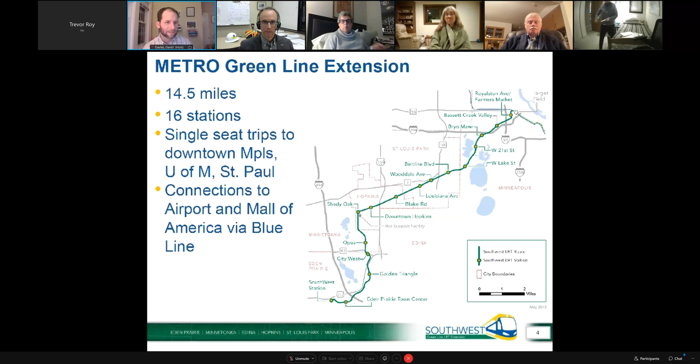I wanted to jump right into getting a better understanding, a brief grounding, of the Kenilworth LRT tunnel and its construction. The tunnel, as a lot of people are aware, especially those who live adjacent to it, is constructed using a cut and cover method. Essentially what we're doing is excavating a big trench, then building the tunnel inside that trench, and covering it back up. The tunnel is almost 2,900 feet long.

In our construction update and in our meeting tonight, we like to talk about the tunnel as divided up into segments, or cells. There are about 30 cells, and they're generally about 100 feet in length. You'll see that when we refer to where construction activities are in the tunnel segments, which segment is being excavated, which segments are having concrete poured in them. So it's a good reminder that there are 30 cells that comprise the tunnel, about 100 feet in length, give or take. Clearly it's not 3,000 feet long, but there's some wiggle room there at the ends.

You'll notice as we go forward that we have lots of different work activities going on at any given time in these cells as we're progressing. For instance, when we're moving through the parkway, we have a work area that's about 700 feet long, where different activities happen almost like an assembly line, one activity in one cell, different activities in the next cell. So it's quite a challenging and complex process to progress construction of the tunnel.

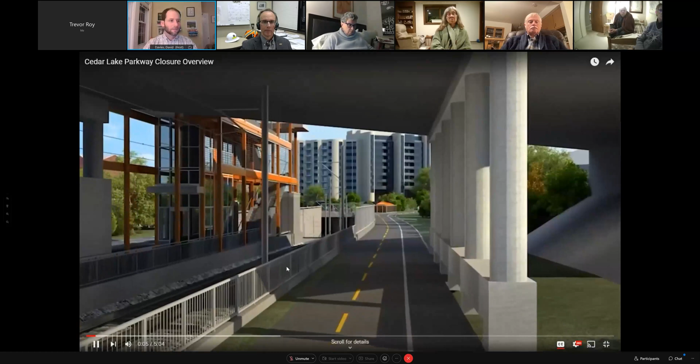The Kenilworth LRT Tunnel is a 2,870-foot structure that stretches from just east of West Lake Street to just south of the Cedar Lake Channel.

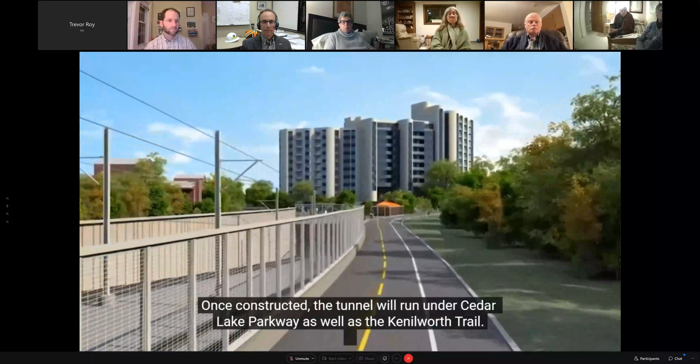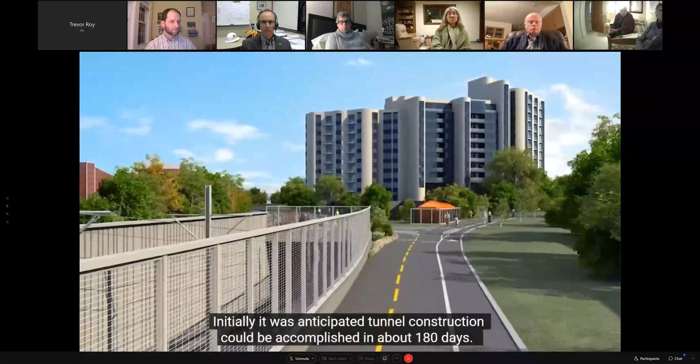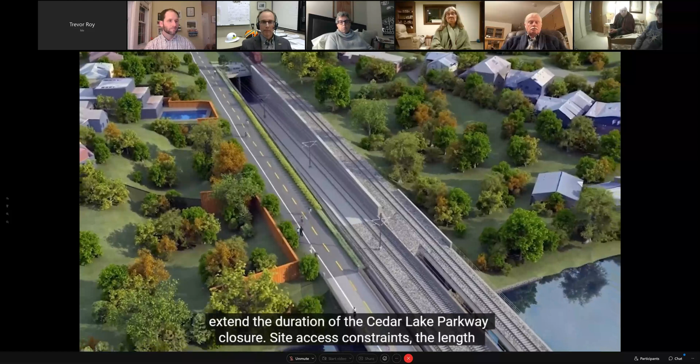Once constructed, the tunnel will run under Cedar Lake Parkway as well as the Kenilworth Trail. In order to advance the tunnel, Cedar Lake Parkway needs to be closed for an extended duration. Initially, it was anticipated tunnel construction could be accomplished in about 180 days. Now that construction has commenced, the contractor faces several challenges that will extend the duration of the closure. Site access constraints, the length of the work area, and the specific order of construction operations all contribute to a longer duration.

It is now estimated that the parkway will be closed in early February and reopen around Thanksgiving.

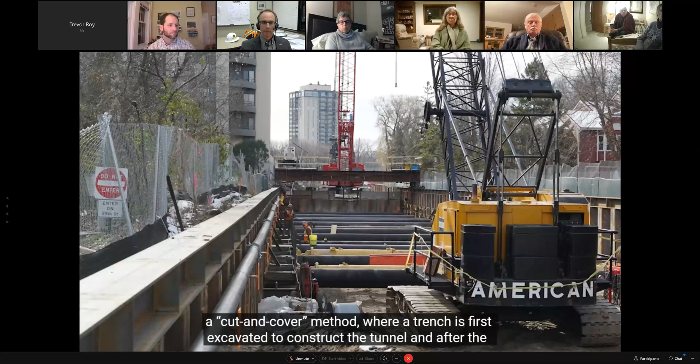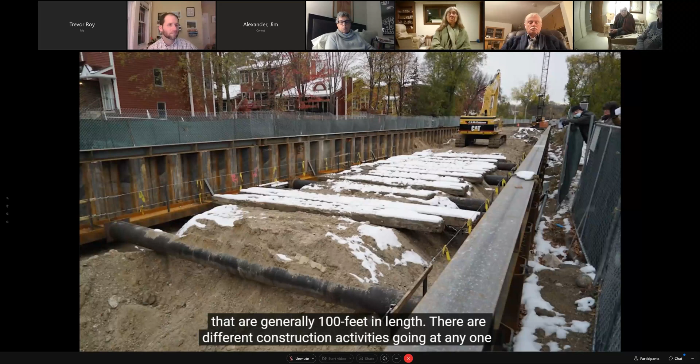The tunnel is being constructed using a cut and cover method, where a trench is first excavated to construct the tunnel, and after the tunnel is constructed, it is then covered up. The tunnel is divided into 30 segments or cells, generally 100 feet in length. There are different construction activities going on at any one time in 7 consecutive cells, creating a work area over 700 feet long.

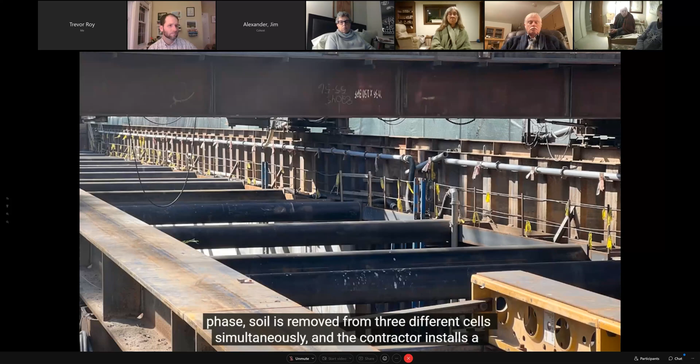During the excavation phase, soil is removed from 3 different cells simultaneously, and the contractor installs a series of supports called struts and walers to provide additional support to build the tunnel. Strut placement slows excavation because materials and equipment have to move around them.

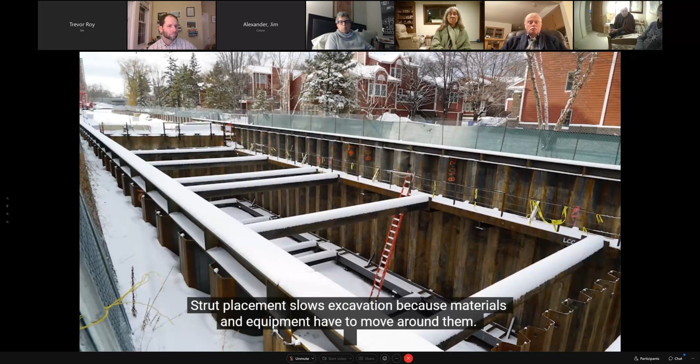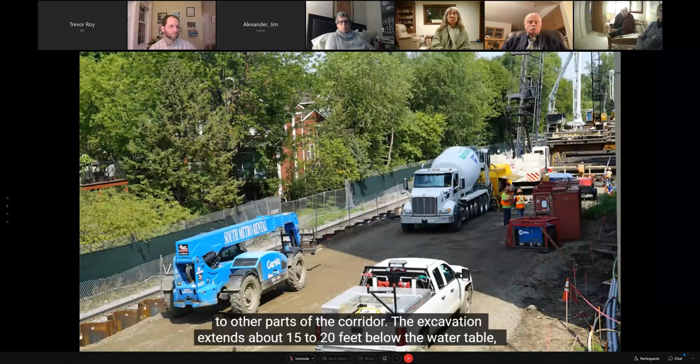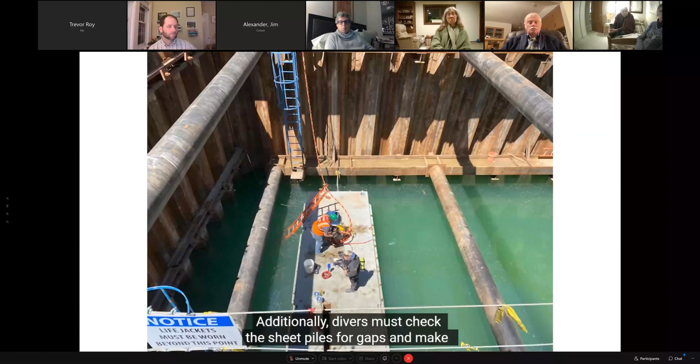Due to tight site access, excavation progresses in a specific linear way to remove and transport soil to other parts of the corridor. The excavation extends about 15 to 20 feet below the water table, further slowing the process, as it is more difficult to scoop and place saturated soils. Additionally, divers must check the sheet piles for gaps and make repairs as necessary. This all occurs in a work site that is only about 50 feet wide.

Construction of the tunnel involves pouring concrete in 6 different phases, each needing time to cure before the next phase of work can start.

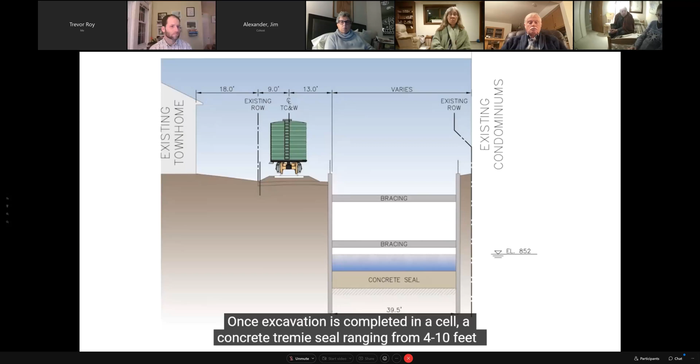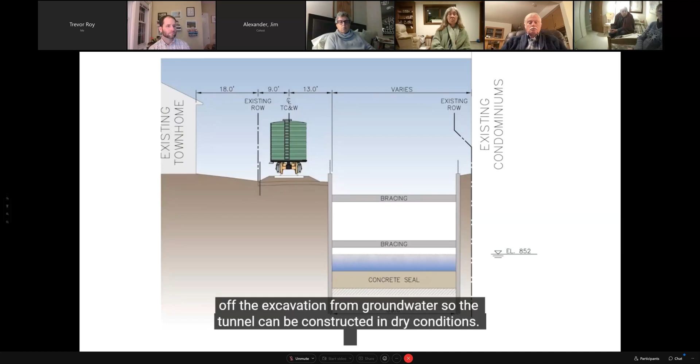Once excavation is completed in a cell, a concrete tremie seal ranging from 4 to 10 feet in thickness is poured underwater to create an anchor for the tunnel structure and seal off the excavation from groundwater so the tunnel can be constructed in dry conditions.

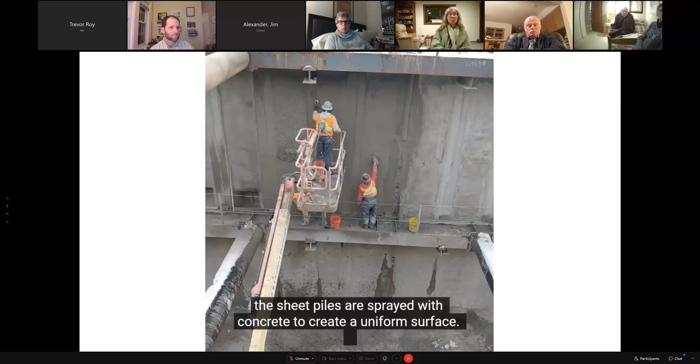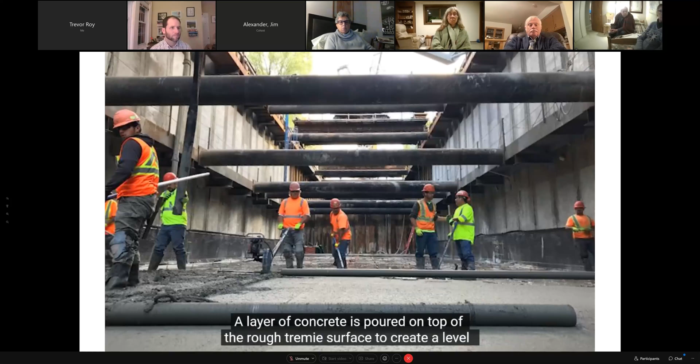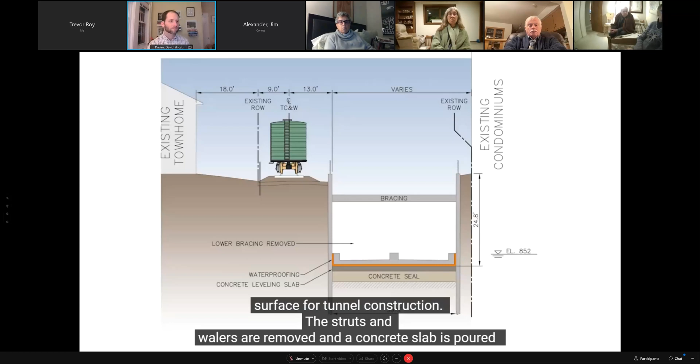After the water is removed from the cell, the sheet piles are sprayed with concrete to create a uniform surface. A layer of concrete is poured on top of the rough tremie surface to create a level surface for tunnel construction. The struts and walers are removed and a concrete slab is poured to create the tunnel floor, which will serve as the final surface for the track bed and rails.

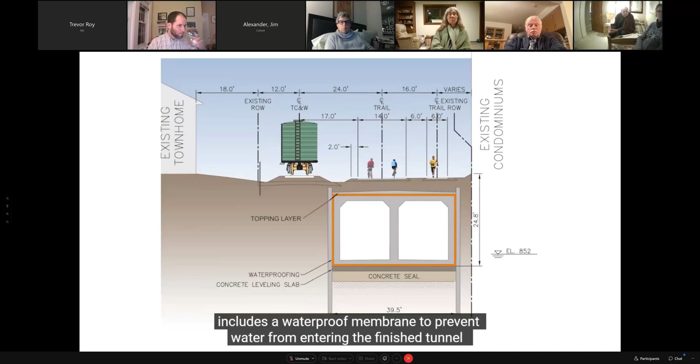The tunnel walls and ceiling are poured in one concrete pour in about 30-foot long segments. A final topping layer of concrete is then poured. The finished tunnel includes a waterproof membrane to prevent water from entering the tunnel, and steel rebar to make it structurally sound.

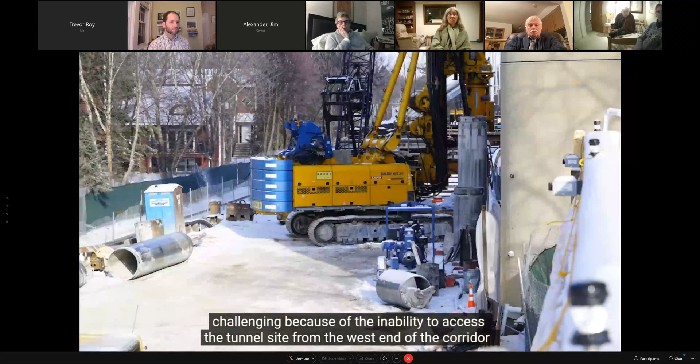The access constraints limit the opportunity to work simultaneously in multiple cells. There is generally only one concrete pour that can take place in a day. This is more challenging because of the inability to access the tunnel site from the west end of the corridor due to the construction of the secant pile wall adjacent to the Cedar Isles condos.

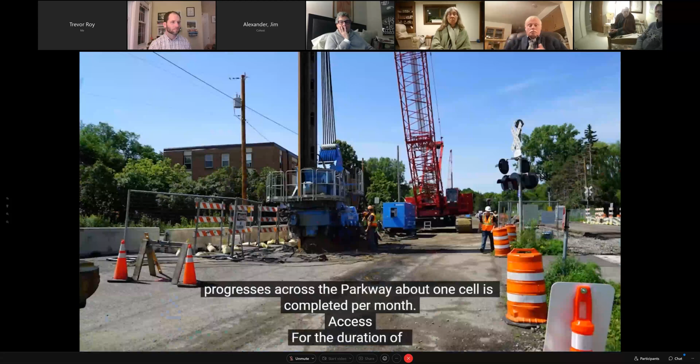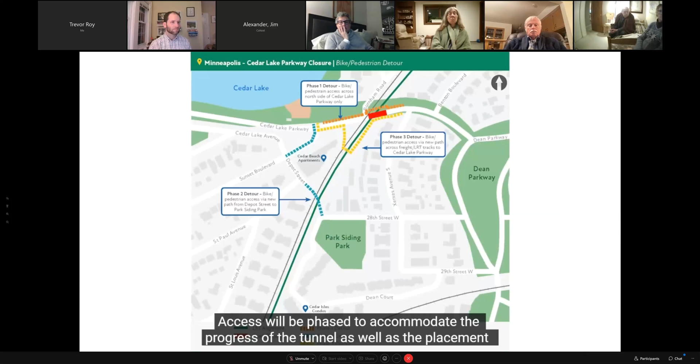As the work progresses across the parkway, about one cell is completed per month. For the duration of the closure of Cedar Lake Parkway, access across the corridor will be maintained for trail users. Access will be phased to accommodate the progress of the tunnel, as well as the placement of a sanitary sewer force main that crosses the corridor between Depot Street and 28th Street.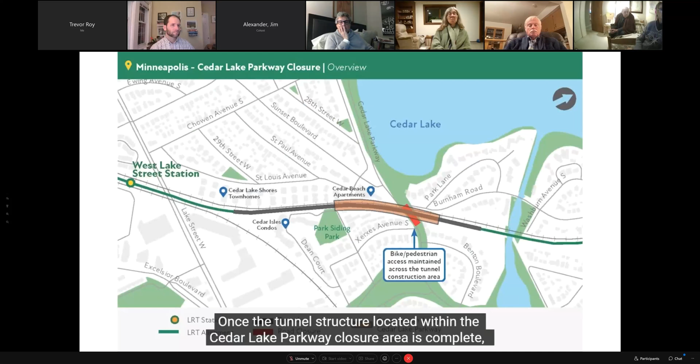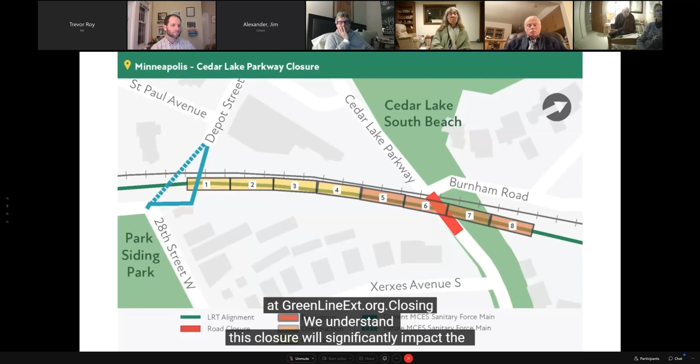Once the tunnel structure located within the Cedar Lake Parkway closure area is complete, Cedar Lake Parkway will reopen. Changes will be communicated through the project website at greenlineext.org. We understand this closure will significantly impact the surrounding community.

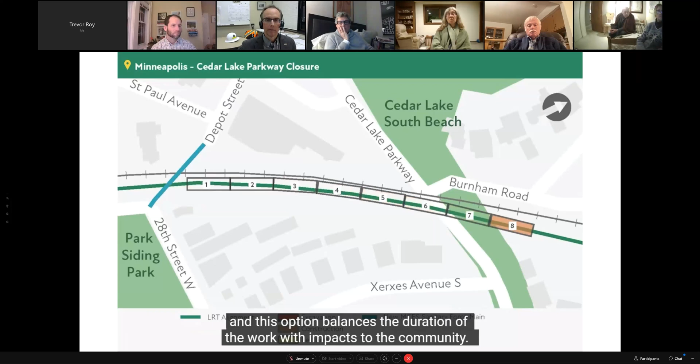The project and contractor have analyzed alternatives for this work, and this option balances the duration of the work with impacts to the community. Project staff remain committed to providing frequent updates to the community regarding this work. For the most up-to-date project information, please visit greenlineext.org.

While I'm getting the PowerPoint back up, I'm pausing right now. I'm going to leave the PowerPoint off for a second so I can have a little better mobility with my chat, and just want to pause for any questions or thoughts before we get into the closure itself. That's part of this was the grounding of what it means to build this tunnel. We've started and progressed in this process, but now we're moving into a phase where, as it impacts Cedar Lake Parkway, we want people to be very aware of what's happening as we progress with this work. Are there any questions at this time? We'll have time for Q&A at the end, but wanted to free it up in case anyone has questions about the tunnel construction itself.

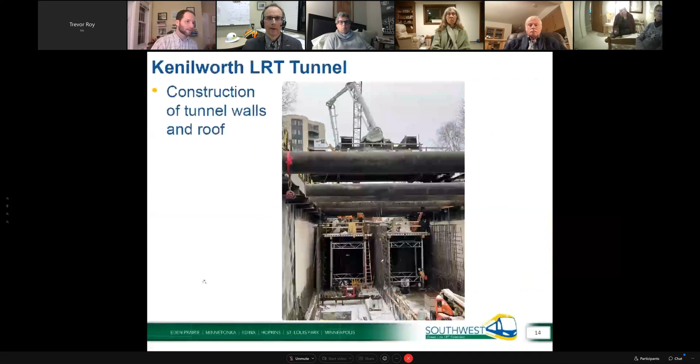So I'm going to skip ahead to the actual closure and turn it over to Jim Alexander, who's going to go through some of the details of the closure. All right, David, thank you.

Jim Alexander, project director. Can you hear me okay? Yes, sir. Right, good. Well, we have closed the parkway already 3 times, and I think we closed up to about 26 days. Many of you are aware that we had initially anticipated 180 days for this closure. That was during design. We did not have the benefit of the contractor's input for that, because that was done before we went out for bid. And now we're faced with the reality. As you see, there's a lot of construction needs to be done.

It's a very lengthy process. We have quite a bit of the tunnel open at any one time, doing different types of activity. And so we are looking at just under 300 days for the closure. I'll say that's a conservative number. We want to beat that. But we wanted to be upfront to acknowledge this is going to take certainly longer than 180 days.

So we are looking to begin this closure in early February. That final date's actually being determined. We're thinking the week of the 7th. But we would look to get things back up on the parkway for vehicle access just before Thanksgiving, probably a little earlier than that, because we'll have to make the time frame to do asphalt paving.

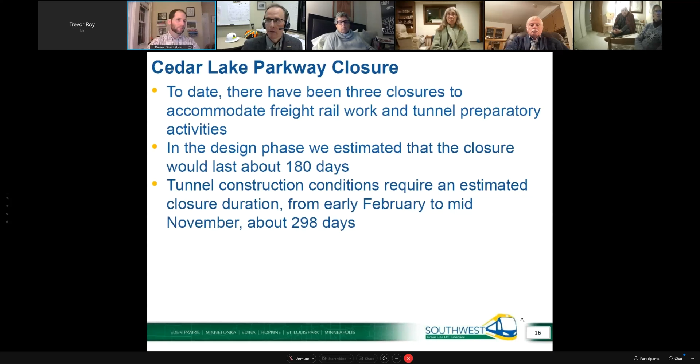Next slide, David. Yep. So the video talked a little bit about this, and we're certainly open for questions, but we are limited on access, and coupled with the challenges we had with getting the sheet piling in, many of you are probably aware that we had some gaps in the sheets. We had to do some grouting to seal up those gaps, but we still have a process where we have to go anytime we're underwater. We have a diver getting involved and looking at the seams of these sheet piles to make sure there are no gaps between the sheets, because there was some splitting that occurred as we were pushing the sheets in, and we don't see that until the excavation starts. So that's a key piece—we have to stop every 3 feet of excavation to do that.

And just getting back to the access, as the video talked, there's really different work going on in each one of these cells. We have about seven cells open at any one time where we're building the tunnel, and we're also excavating the other end. And just to progress through the parkway, all that activity needs to get started with the excavation.

We need to pour all the concrete down below the tunnel, pour the concrete for the tunnel, and then ultimately backfill it. The secant wall has also challenged us with limiting our access. The contractor intended to access the construction from both ends to have this done more speedily, but with the secant wall, they're limited in going one direction because of the secant. There's really no room to bring equipment around the drill rigs we currently have at the Cedar Isles condominium and parking garage.

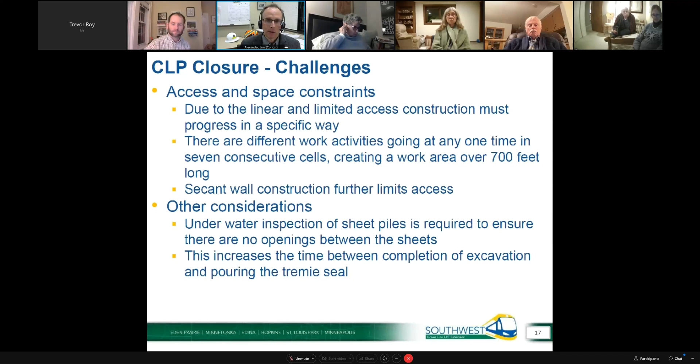So this is just a first configuration showing the parkway closure. I want to emphasize that we have committed, and we still are committed, to provide pedestrian access across the construction area. That will change as we go through different phases, and we'll show that in a subsequent slide, but we will maintain that during construction.

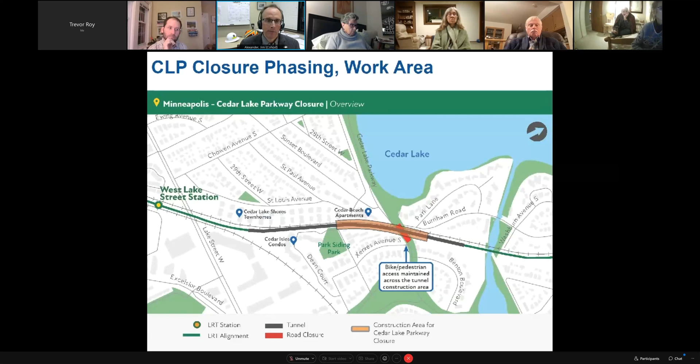So just imagine those different cells under construction that were shown in the video, where we essentially have all cells 1 through 7 open at one time, with excavation on the east end, on the right side, and the tunnel getting completed on the left side. The line work in blue is a force main that we've had to relocate. That'll eventually be located on top of the tunnel, and that work needs to be completed as we progress through this area.

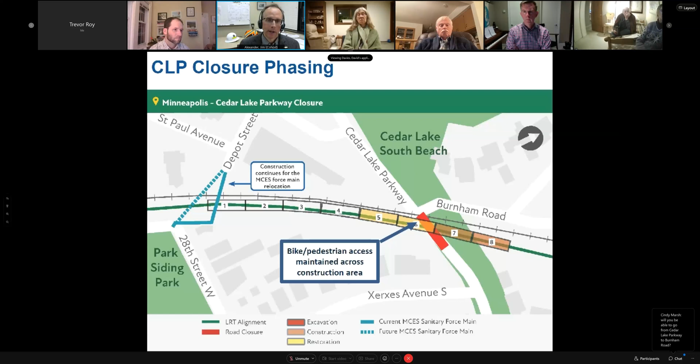I think these next slides just show the progression of how that would look. The tunnel construction doesn't stop at 8 — for graphical purposes we just truncated it there. The tunnel actually progresses just short of, or just west or south of, the channel, but here we're showing it coming through the parkway for depiction. As you can see, we'll eventually progress with that construction and restore the parkway come fall, then reopen for traffic with the force main back in place as intended.

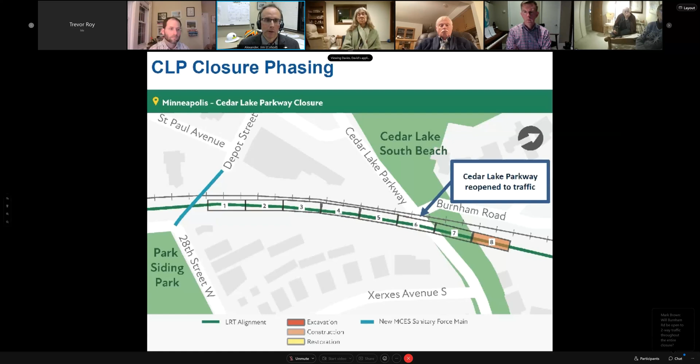Next slide shows the pedestrian and bicycle detour. We're going to stage that to accommodate the different construction activities, and we're going to work with the city and the park board. We've already started working on some details on what that access will look like, and we'll be communicating through our normal means, GovDelivery, to announce any shifts that occur. Currently we're thinking of 3 phases, and we'll show that in the subsequent slide.

For automobile detours, we have essentially what we had in the past — variable messaging signs in place, and a lot of information on our website to alert motorists about the upcoming detour. Burnham Road will be temporarily converted into 2-way traffic up on the bridge between the boulevard and Sheridan Avenue South, and likewise a segment on Lake of the Isles Parkway will be converted temporarily to 2-way traffic between Dean Parkway and West 24th. There will also be continued access at the alleyway at Xerxes Avenue and up to Benton Boulevard.

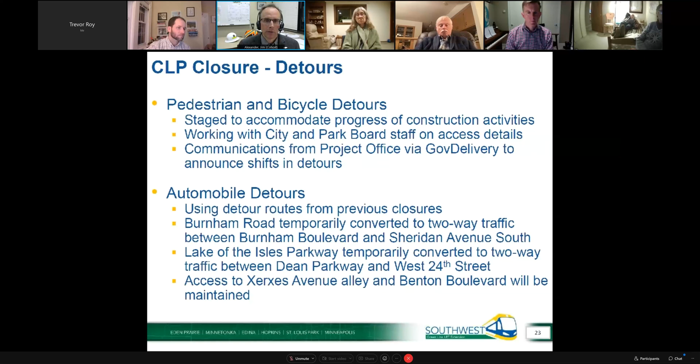So the next slide shows the configuration of what those access points will be. Initially, in orange, a little hard to see on the image, we'll have the same detour as we have today — really not a detour, just the route on the north side of Cedar Lake Parkway. Eventually we'll transition into phase 2, the line work in blue, where it comes from 28th and we make our way over to Sunset and over to Cedar Lake Parkway where the trail is. Then phase 3 will be in yellow, where we'll have to move it just off the parkway and then bring it back to Cedar Lake Parkway.

So this is the automobile detours — again, a similar detour route to what we had in place before. We look to get messaging signs up ahead of time before the closure begins, with the routing shown in blue and orange. And I think we have another image for this as well.

So again, the closure, we're going to use the same automobile detours we've had in the past for the closure, and we will maintain that bike and pedestrian access across the parkway or across the construction area.

So David, I think that's the conclusion of the slides. Be open for any questions.

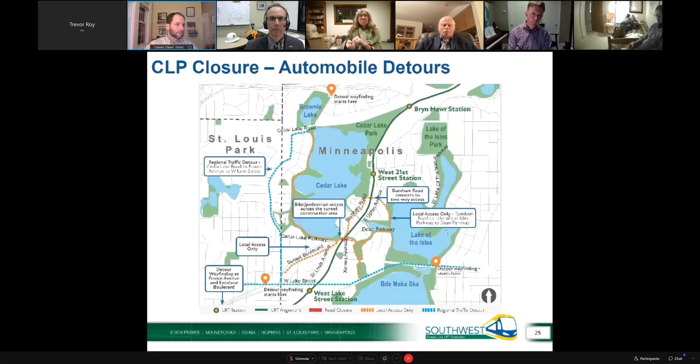We had a question about pedestrians and bikers crossing Cedar Lake Parkway. Backing up to the phasing, I know it's a little hard to read on screens, but note, folks, that we've got three projected phases for the pedestrian and bike detours. The first is what will be in place when the parkway first closes, and for this question about coming down Depot, that would be phase 2, the middle phase of the work. We would anticipate putting peds and bikes down Depot and across the tracks safely to connect up to 28th Street West, which will take people over to meet up with Dean Parkway.

How close to the Cedar Lake shores? I know that the fence that's there today is pretty much on the construction easement line, so we are keeping, from my understanding, that work on our side of the fence. Right, Jim? Yes. So it would mean repositioning how that area looks today, because that's already a pretty tight space with some of the equipment that's there. Going back to the chat here.

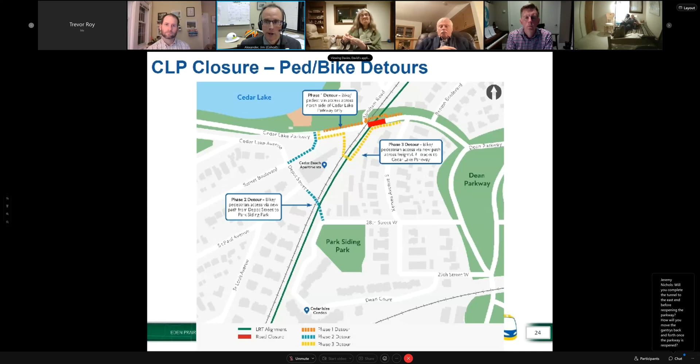Andy, Jim, I don't know if you have anything to add specifically to that. Jim, I think the only other thing that we've heard from residents is that the hydrovac has been a little bit noisy at times when we're dealing with water and sort of the sludge after the tremie pour, as we're cleaning up and getting ready to progress work up from there. We've heard that from some residents as something that's been a little bit noisy, so we're working with the JV on that one as well.

Right, so that's a big vacuum cleaner that's used to clean off the excess concrete. Thanks, Andy. Yeah, and Jim, I'll add I think the vacuum truck is just one example of the equipment and machinery that you don't necessarily always see in the images that we show, right? We show the big equipment, the cranes, the excavators, and then there are things like the vacuum trucks that are kind of cleanup or maintenance, pumping, generators, things like that, which we try to use as things that are as quiet as possible, but still do sometimes result in some noise that wasn't there before. And certainly that's what I hear when I'm talking to residents who are adjacent to the excavation areas. These are the things that kind of travel with the work as it progresses.

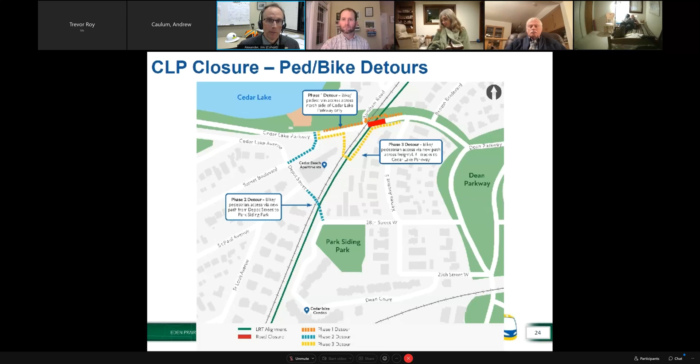David, Jim, it's Laura. I posed a question, and the reason I asked it is because I know we've talked about it in the CIDNA level and other community spaces, but I don't think we had the information that the alternative was a 10-month closure when that was being discussed. Now that we have that time frame, I think it's worth revisiting what people's appetite is. Other people have different needs and different expectations for their summer hours, but it does seem if folks are already arriving early and kind of hanging out a little bit afterwards every night, maybe we could punch in a couple extra hours. So happy to take that offline.

Kind of returning to ped safety, which I know we are really thinking of when we think through these detours. This is kind of a specific request, but I think we'll chalk it up to how we look at ped safety in this area with these detours: adding a flashing light ped crossing by the beach. If you were to ballpark it, it's probably right where we have our hash marks coming down for phases 2 and 3. Just with the idea that there are a lot of cars not only coming down that area, but maybe attempting to turn around due to the closed road. So just something for consideration - wanted to highlight that.

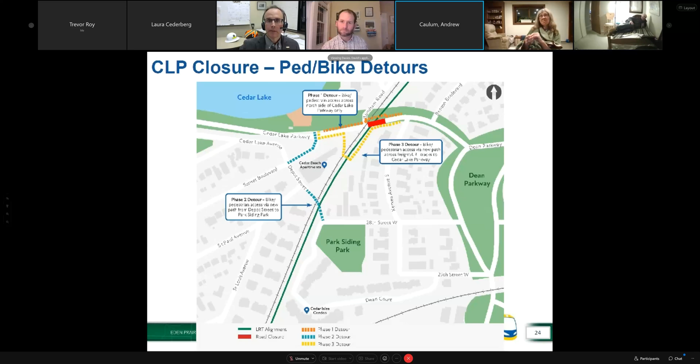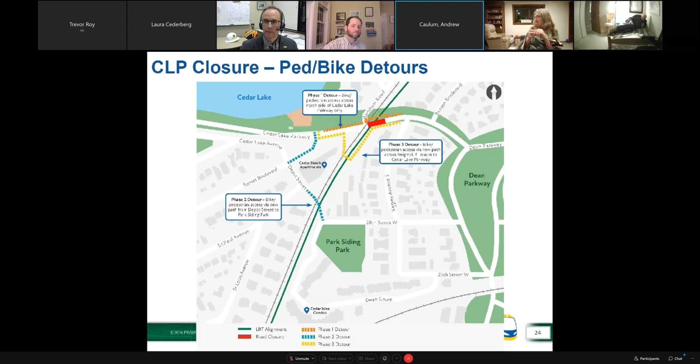Yeah, sure, I'll take that one. This is Andy Caulum, the car here for the east side. So I think you're asking, complete the tunnel all the way towards the channel, and that would be a no. We'll open the Parkway as soon as we're clear of it, and get the rest of the trails, sidewalks, and flat work open as quickly as we can. Regarding the gantries back and forth, we'll have to dismantle them in some capacity and move them back. They'll probably have to get cut out of there in some capacity, and LMJV will have to reposition those if we can't get those out of the way prior to that. The system all needs to progress to the east or the north, depending on how you look at it, and it's absolutely necessary for us to construct that tunnel, so we can't not use it. So it'll have to get moved or doubled up.

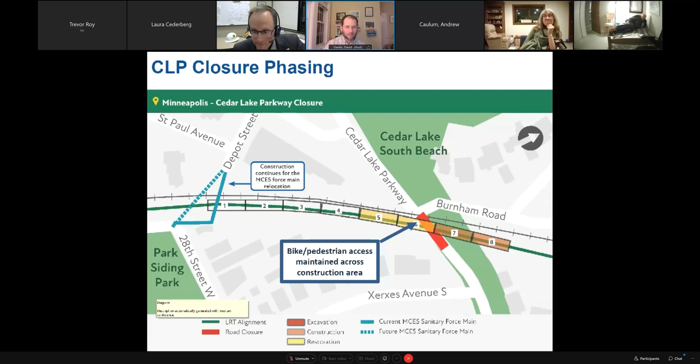Thanks, Andy. I just wanted to note, this will be available online too, so people can toggle back and forth between these graphics. This graphic was an attempt to show people, as Jim mentioned, we only show the cell labeled cell 8 here. Of course, tunnel construction is progressing past that, not shown in this graphic, but at this point, as soon as we get moving this way, this is what we anticipate: that cell marked 8 will still be in construction, but that will be clear and able to restore and open the Parkway.

Got about a little more than 5 minutes left, so we'll run through a few more questions here. There are a few folks talking about extended hours, and certainly that'll continue to be a conversation amongst the community.

Cement trucks waiting in queue today on St. Paul, a little bit off topic. We thought they only got permission to line up on Depot. I know we're always trying to keep an eye on activity in that area. I know that it's a busy place, and we've got a lot of traffic there that wants to deliver their payload and get out of there as fast as they can. That's what I'm under the impression, and sometimes those trucks kind of stack up.

This is Andy again, I'll jump in. I think those loads are timed, and we've been working with LMJV, and we'll continue to work with LMJV to batch that concrete appropriately to minimize queuing wherever we can. Specifically on St. Paul versus Depot, we can discuss minimizing that with the contractor in an effort to address that issue. But we're dealing with some drivers, and the constraints of actually getting the concrete batched and to the point of placement. There are some other considerations to be made there, but we'll certainly continue to do our best to minimize where we can.